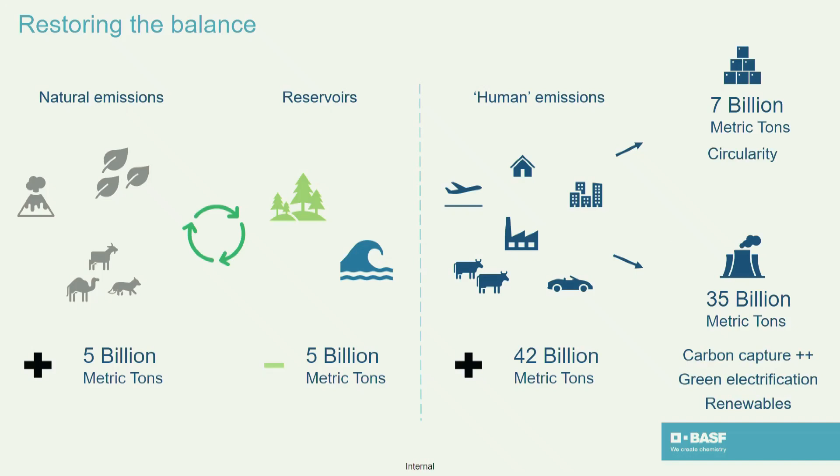And that is why we believe that just carbon capture may not be a solution. We have to look at it holistically as to how we can replace fossil fuels itself in its various chemicals that are made from it, and then circularity primarily to aid further carbon capture from the environment. Moving on to the next one.

So this presentation is more about covering what BASF enables in this ecosystem. I'm from the catalyst business, as you would have seen from my designation. So as a catalyst provider and a technology provider, what is it that BASF is able to offer to enable sustainability? And also, I'll touch on a few things where BASF is leading the initiatives on sustainability as well.

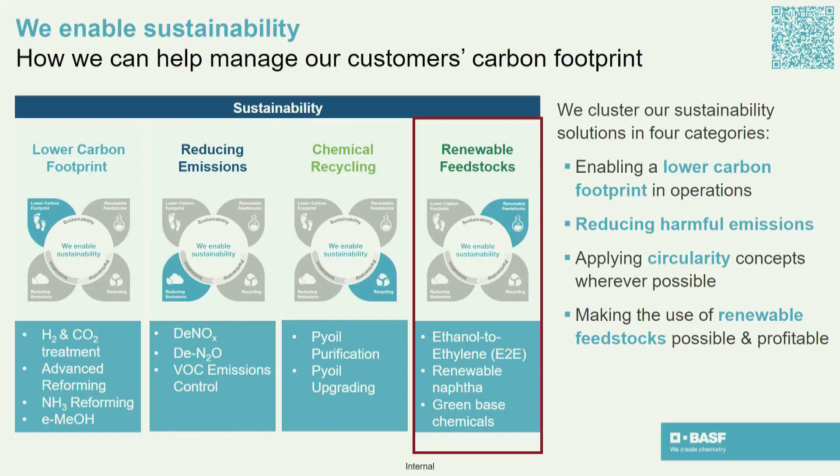From the catalyst portfolio, we are able to cover the whole gamut of sustainability, which is either you reduce your carbon footprint or you reduce your emissions, look at chemical recycling or renewable feedstocks. I'll touch on renewable feedstocks primarily here, which is the theme of this conference, biofuels and biorenewables.

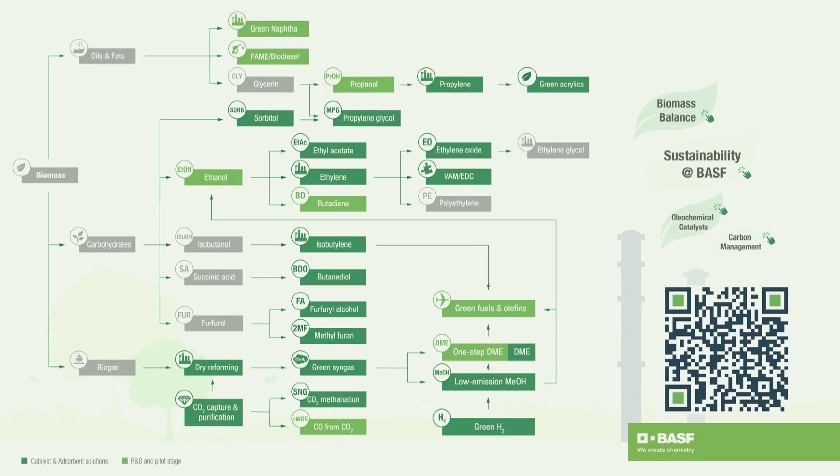This is what we call the green map, and a larger version is available behind you as well. Here, the dark green boxes indicate wherever we have been able to convert biomass into various chemicals that can go into replacing fossil fuels. And I would like to draw your attention towards two such things. One is butanediol and the other one is ethylene.

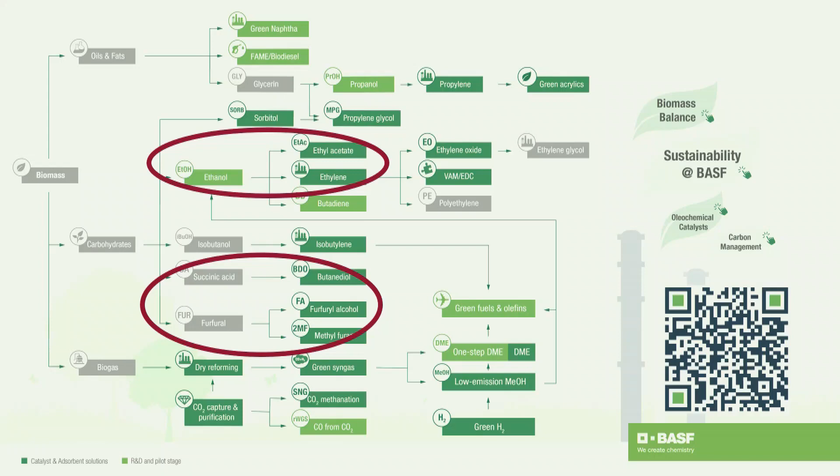Now these two are very important chemicals. Ethylene, as we all know, is one of the backbones of the packaging, automotive and other industries. And butanediol has a variety of applications in pharmaceuticals and in polymer industries as well. Now, these two chemicals through bioroutes are already successfully demonstrated through our catalytic technologies. I'll not get into details of each box of this; that is available with our colleagues, and we can discuss that in case you are further interested.

But sticking to the theme of this conference, I'll talk more about biofuels, how we can enable the conversion of biomass into biofuels, and particularly I will touch upon SAF, which is sustainable aviation fuel. There are two routes that we see as more commercially viable, but there is a whole lot of possibilities to look at. We can reach bio-SAF either by converting biomass into carbohydrates, or looking into pyrolysis oil through waste cracking. We can also convert it into alcohols like ethanol and methanol, and then take it into higher alcohols. I'd particularly touch on SAF production through ethanol and methanol, starting with methanol.

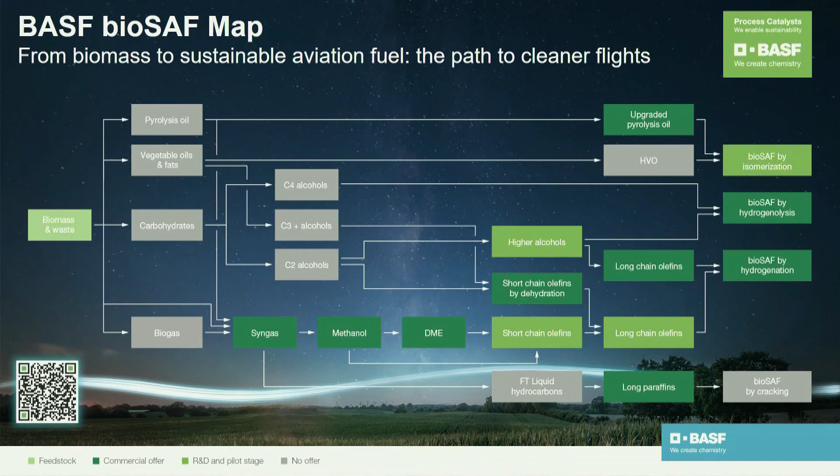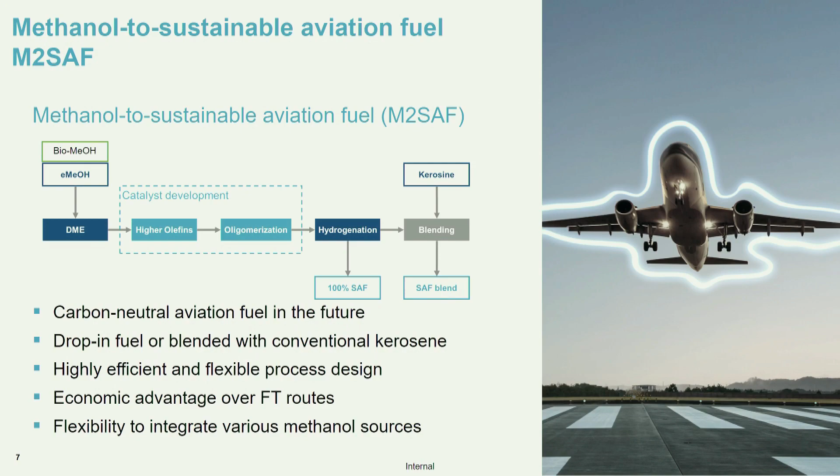Now, the question that might come to your mind is, how do we get to methanol first from biomass? And this is where BASF has been able to demonstrate its state-of-the-art technology, whereby we can tap into biogas as a source, and through dry reforming, we can get to bio-syngas, which can be taken to methanol. And I would like to give slightly more details on this.

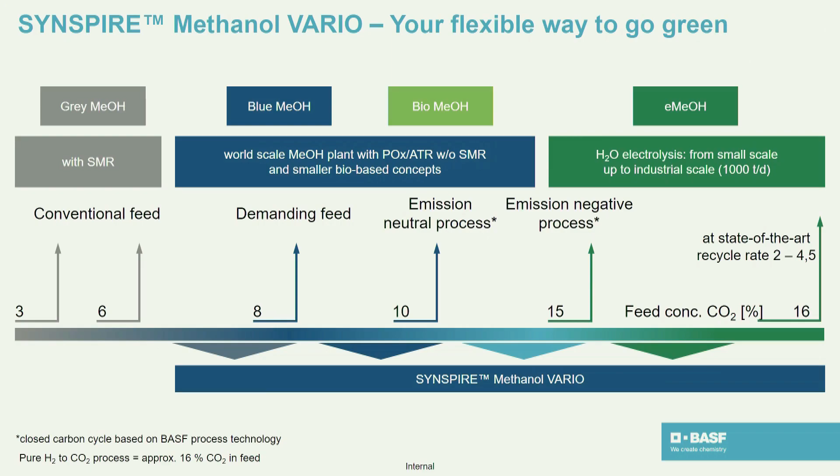Conventionally, methanol feedstock would see a CO2 percentage of roughly 3 to 6%. That's what is there in the conventional feedstock. But with the catalytic technology, the first generation that we have launched, which is called the Synspire Vario catalyst, we have been able to take that up to 10%. And we are also working on what is now known as e-methanol, where you take CO2 straight into methanol, and that would be pure CO2 going into methanol in combination with either blue hydrogen or green hydrogen.

So this catalyst that we have is already put into use, and you'll see that in the next slide. It's already operating for the last 2 years in one of our own plants. BASF has a number of methanol plants, and we have replaced an incumbent catalyst there with this catalyst, where CO2 is being taken from a nearby plant.

And this catalyst has demonstrated long lifetimes compared to a conventional catalyst under these kind of circumstances, where you have high CO2. It has been very tolerant to the water which is formed during the reaction, and has demonstrated excellent thermal stability over the course of its current usage.

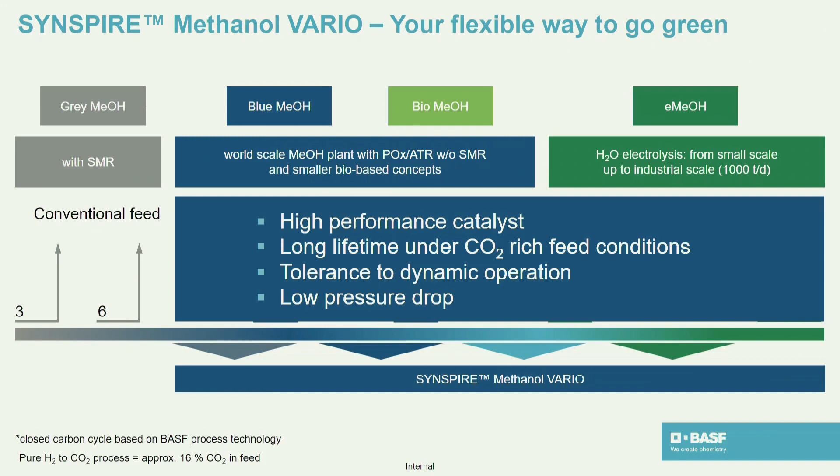Looking at ethanol here, the key steps that you would see primarily are ethanol to ethylene. Now, making ethanol from biomass is a very well-known process in India, and that's a fermentation route. But once you get ethanol, how do you get into SAF? So the key steps here would be ethylene and oligomerization steps.

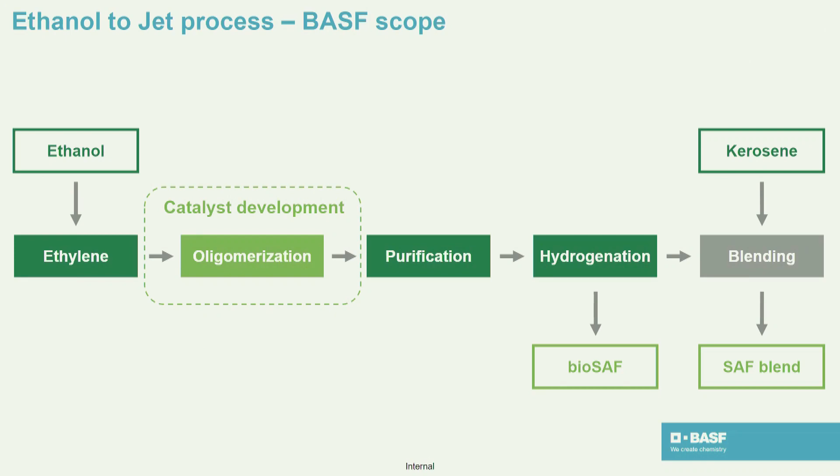Ethanol to ethylene is a commercial step which BASF has already demonstrated successfully, and one of the plants in India is already operating based on that process, where they make bioethylene. The next step is oligomerization, where we are currently already developing a catalyst, and we are in an advanced stage to start a pilot on that. And the rest is pure standard purification and hydrogenation, which will take you to SAF.

Ethanol to ethylene is done over an alumina-based catalyst, and it's primarily a dehydration process. There are 3 plants in the world at this point in time which are operating on this catalyst, spread across the globe, 2 of them in Brazil, and 1 of them in India. And this catalyst has shown phenomenal stability and selectivity towards ethylene. We can get up to 95 to 98% selectivity towards bioethylene using this catalyst.

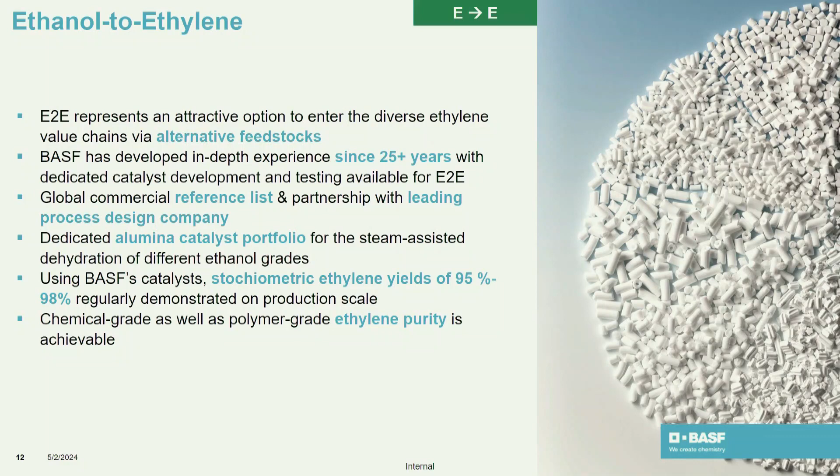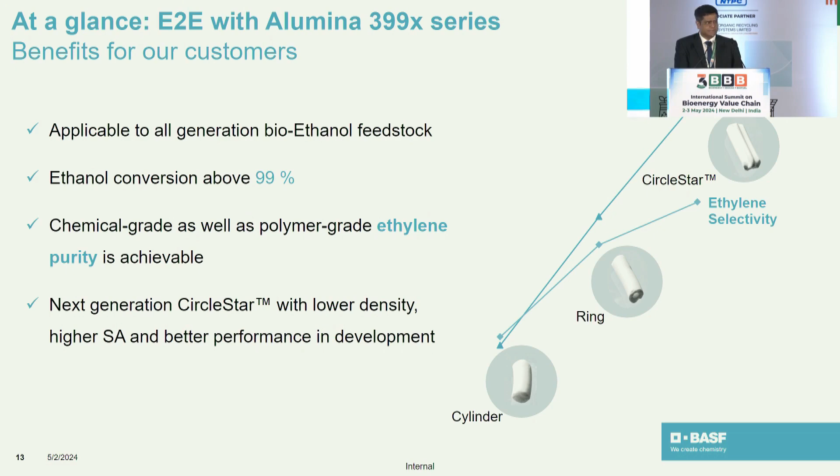We have also gone ahead in the development of this catalyst. The current catalyst that is in use is a ring-shaped catalyst. We are now looking into more of a star-based geometry, which can take the selectivity levels up to 99%. And that will be a breakthrough in this technology, because with 99% ethylene, you can actually take it to polymer-grade ethylene. And polymer-grade ethylene, if it's coming from a biosource, can help us replace a lot of fossil fuel-based ethylene which is currently in use.

Talking about oligomerization, this is one of the key steps and one of the most difficult steps that we have seen. It can be easily done using homogeneous catalysts, but that's not what industry is looking at. What we understood from industry, they're more keen on heterogeneous catalysts, and that's where zeolites come into the picture. We have a great understanding of zeolites, where we know which dimensions we need to pull, whether it's chemical stability of the zeolite, more aromatic production from the zeolite, or more thermal stability of the zeolite.

Currently, the first generation that is in place demonstrates excellent activity towards ethylene oligomerization to higher olefins. We are also working on the second stage, because the first stage is not so stable on the oxygenate side. So we are looking at how we can make it more stable with oxygenates, and the thermal stability of the zeolite. We are already at an advanced stage with this zeolite, and most likely we'll have a pilot plant coming up soon, which will provide us the breakthrough to take ethanol into SAF.

So yeah, some of the collaborations that we have already been into. So dry reforming: as I said, biogas is an excellent feedstock for syngas generation, because it has both CH4 and CO2 in it. There's no need to purify in case you look at dry reforming to make syngas.

Both CO2 and CH4 will give us a 1:1 mole ratio of CO and H2, that is an excellent feedstock to be taken along and blended with green hydrogen to make methanol. So we are already in association with Linde here, but that's not an exclusive association, it's a non-exclusive association.

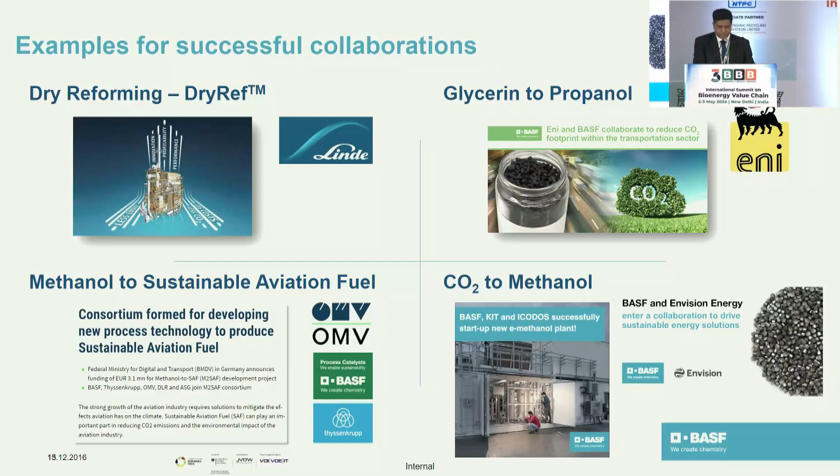And then methanol to aviation fuel, we are already working with a consortium here, and once the oligomerization step is in place, we would be able to roll out this process pretty soon. CO2 to methanol, already a plant operating, and there is a pilot plant working right now on 100% CO2 to be converted into methanol. So that was on how we are able to enable, through our catalytic technologies, some of the solutions on sustainability.

And what BASF has been doing, I'll just glance through that. It was in 1990 that we embarked on this journey. Since 1990, we have doubled the volume of our products, but we have actually halved our emissions. And it's not carbon dioxide capture or anything. We have only looked at N2O and NOx. We all know N2O has around 250 times the global warming potential of CO2. Just capturing N2O and NOx from our various plants has enabled us to reduce our emissions by half while doubling our volume.

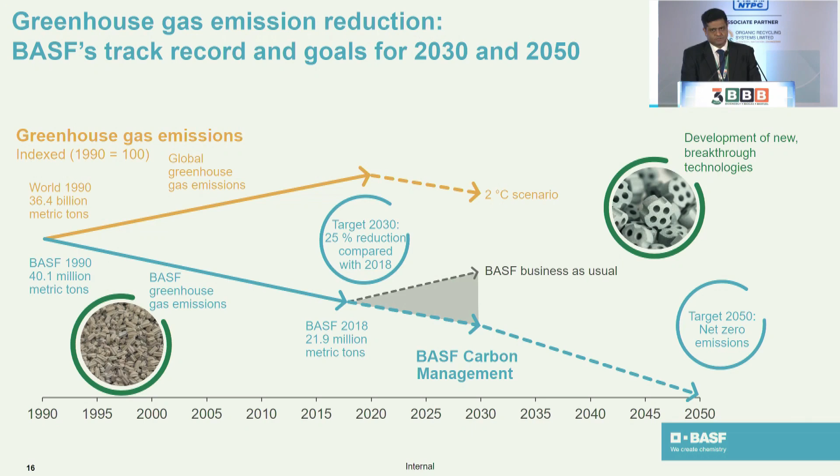From here, the aim is to get to net zero between 2045 and 2050. Looking at the immediate term target, which is 2030, we are looking at roughly a further 25% reduction in CO2 emissions. Some of the pillars we are looking into are either acquiring or generating our own green power. We have already invested in a couple of wind farms in Europe for that. Then generating green steam using green power, and electricity is one of the areas where we are focusing pretty strongly.

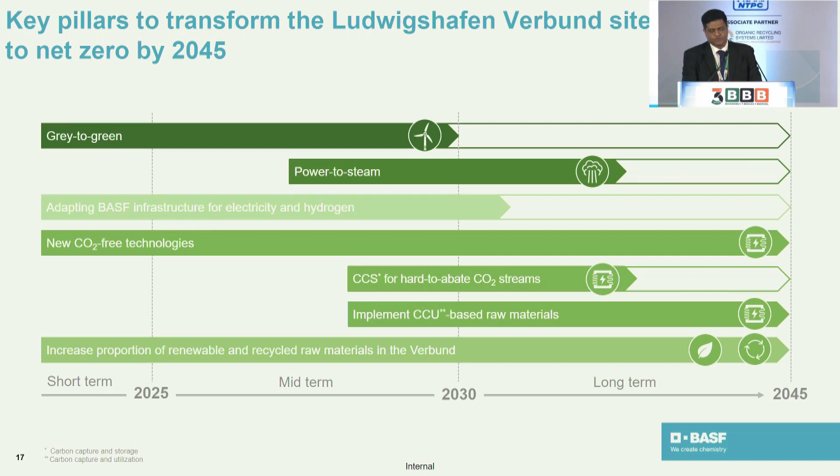Then we are also looking into new technologies. A couple of them I have already put on the slides, and you would have recently heard that BASF, Linde, and SABIC together have started an electric steam cracker furnace, where electricity will be sourced as green electricity. We are also looking into projects ourselves for carbon capture and storage, and carbon capture and utilization. A couple of these projects are already in discussions with various collaborators, and also funded by the German government.

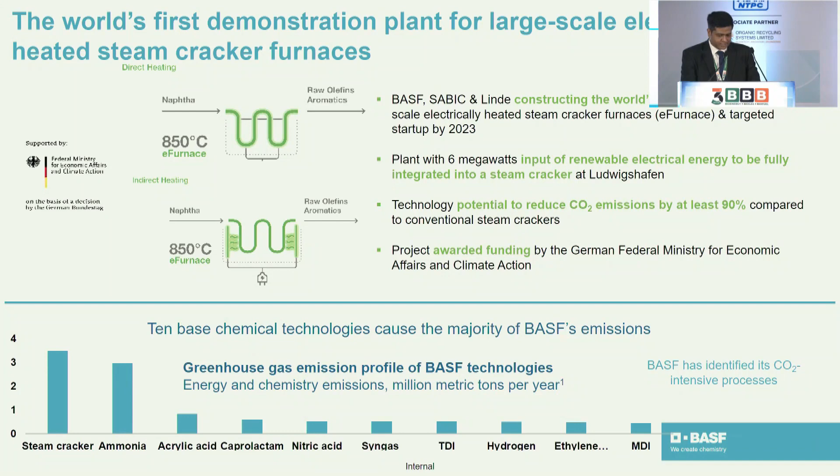This is the picture of one of the steam furnaces, an electric furnace. There are two modes of heating that we are looking at. Though we call it an electric furnace used for cracking, designing this and ensuring that it gives optimal conversion to olefins is not an easy task, because you're reaching temperatures of close to 850 degrees centigrade for cracking the paraffins. We have designed this plant and successfully commissioned it. It has been in operation for almost a month, and as of now, it's working as envisaged.

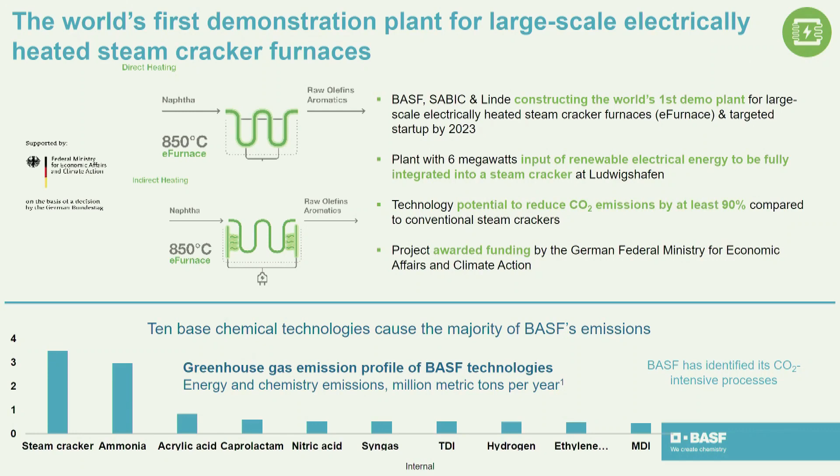The other one that we are working on is methane pyrolysis. Methane pyrolysis is one of the key technologies which gives you only hydrogen and pure carbon. This carbon can be utilized for various purposes, including battery technologies, integrated with the plants making batteries. And the hydrogen that we get is pretty clean. This plant is also under demonstration at this point in time, and hopefully, if this trial run is successful, we could see some of these rolling out into market as well.

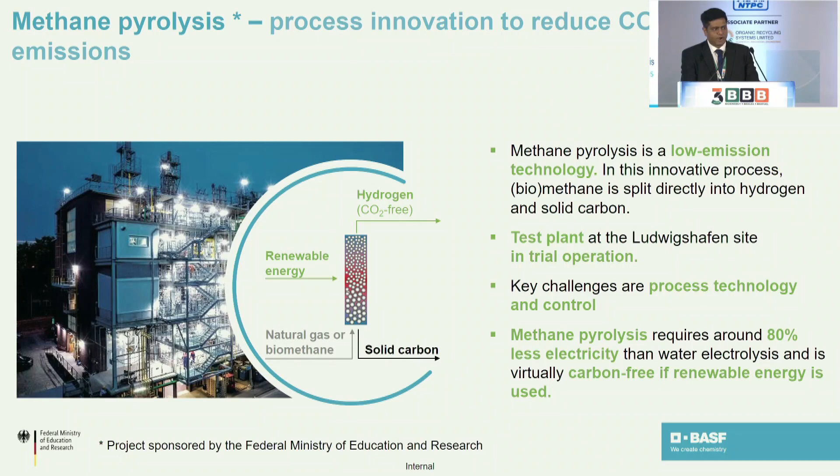And finally, one area where I would like to focus attention, which also ties in with the green map I showed earlier: BASF has embarked on and got certified something called the biomass balance approach. In this approach, the feedstock is taken through the bioroute, and we are able to trace it to the end product, how much of that product or intermediate is coming from a bio-based source. This enables us to brand the product in a biomass balance approach as to how much percent is green and how much percent is gray.

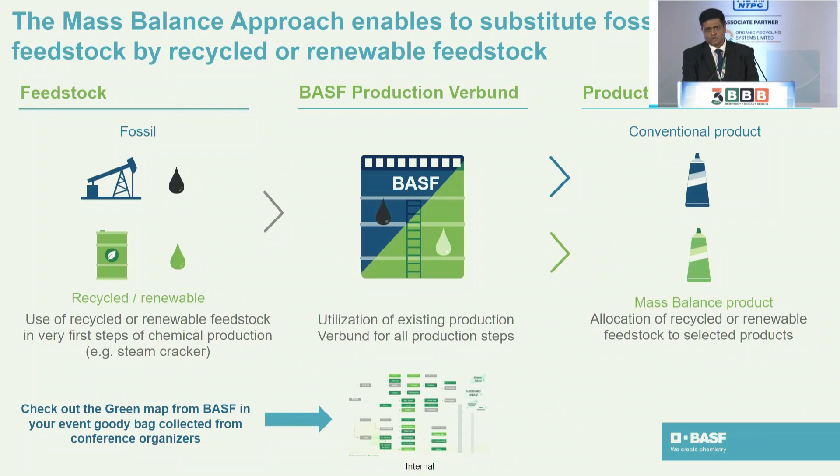This approach is already certified by ISCC Plus and RedCert, and is something which BASF can help other industrial players to embark onto. Along with that, we have also looked into product carbon footprint mapping, and we have done mapping of almost 60,000 products that we manufacture, with each of them having its carbon footprint known. That's a tool which we are able to provide to market players to look into their scope 1 and scope 2 emissions as well.

So that was, in short, from our side. Thank you so much. If there are any questions, we'll be willing to take them.

Just another question. You mentioned ethanol to ethylene. Now, how do the economics work if you take ethane to ethylene, ethanol to ethylene, or naphtha to ethylene? Sure. So here I would like to tell you that, when we talk about economics for these processes, the customers who will be buying this ethylene will not be the normal customers.

For example, today, if I were to ask you which airline is using the maximum SAF, I'm pretty sure it will be very difficult to guess. And that's FedEx, DHL, Blue Dart. These are the kind of people who are using the maximum SAF, because for them, the incremental amount which goes into using bio routes is justifiable given the end product pricing that they have.

Similarly, for bioethylene, today India Glycols is one of the companies actually operating based on ethanol to ethylene. They are selling it to companies like Coke, who use it for making their PET bottles, which you see for standard cold drinks. So economics is a very relative word, in my opinion. If you are going to use this ethylene for typical food packaging, it may not be economical. But if you are going to use it for applications which drive a premium, certainly possible.